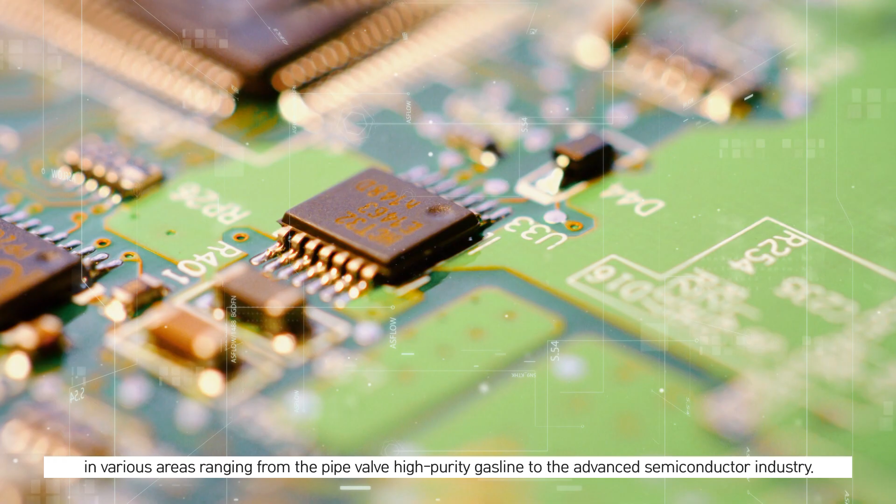Asflow Company Limited specializes in manufacturing technologically innovative parts and materials in various areas, ranging from pipe valve high-purity gas lines to the advanced semiconductor industry.

Having grown with the history of the Korean semiconductor parts industry, Asflow successfully localized semiconductor processing parts, first in Korea, and leads the semiconductor parts market.

Asflow has many patents and certificates of innovative and excellent products. By making more efforts to grow further and open new markets at home and abroad, the company will honestly and sincerely provide the best products for customers.

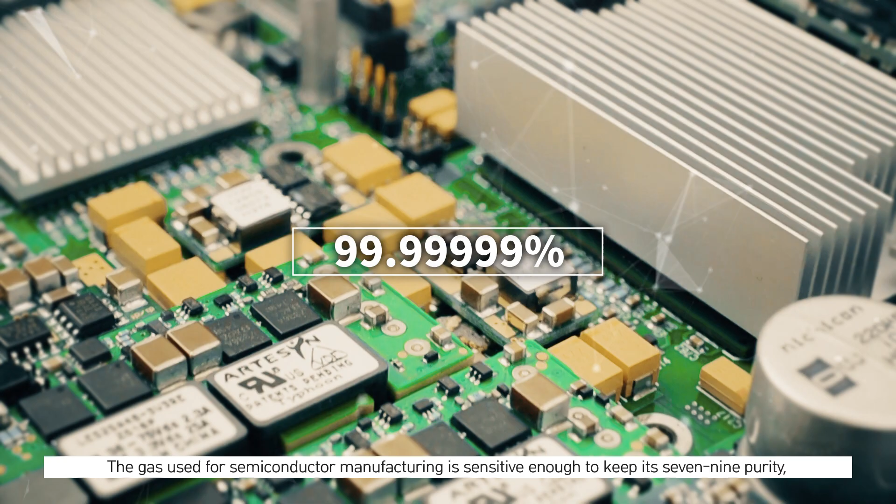The gas used for semiconductor manufacturing is sensitive enough to keep its seven-nine purity and is very corrosive. To transfer the gas, it is necessary to use parts with high corrosion resistance and ultra purity.

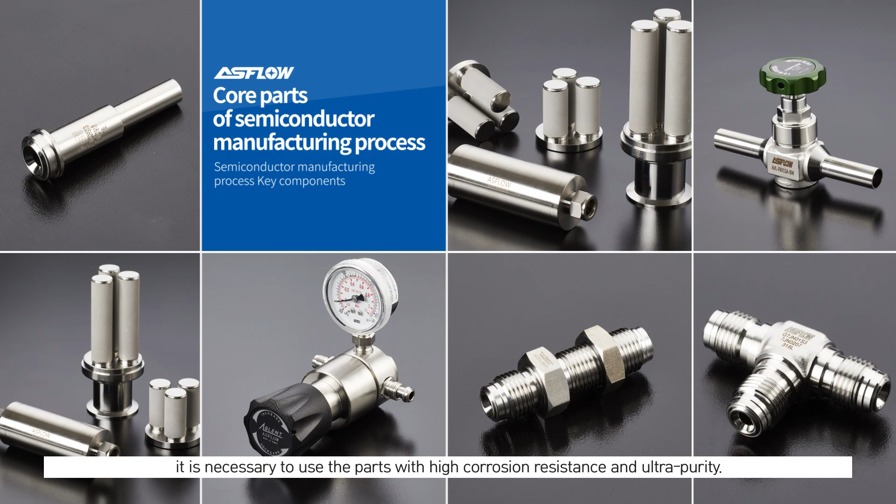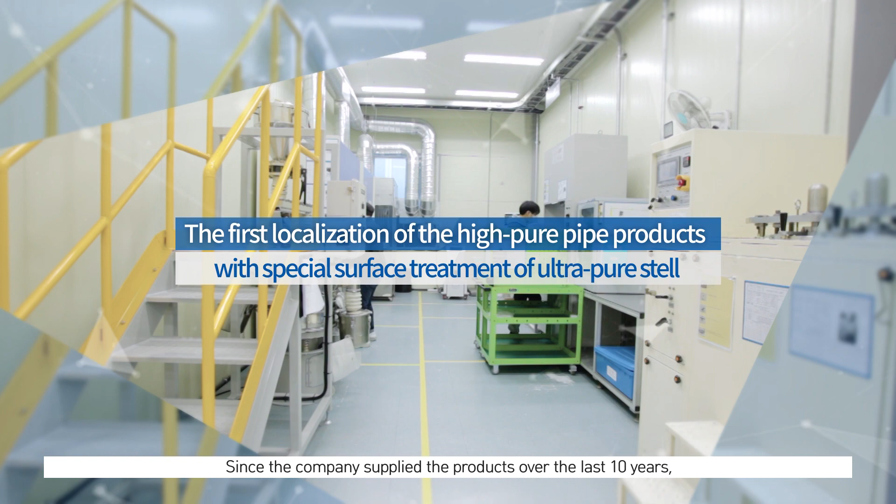The high pure pipe parts for semiconductor processing gas transfer had fully been imported. Asflow first localized them for the first time in Korea. Since the company supplied the products over the last 10 years, it has achieved import substitution worth 1 trillion KRW so far.

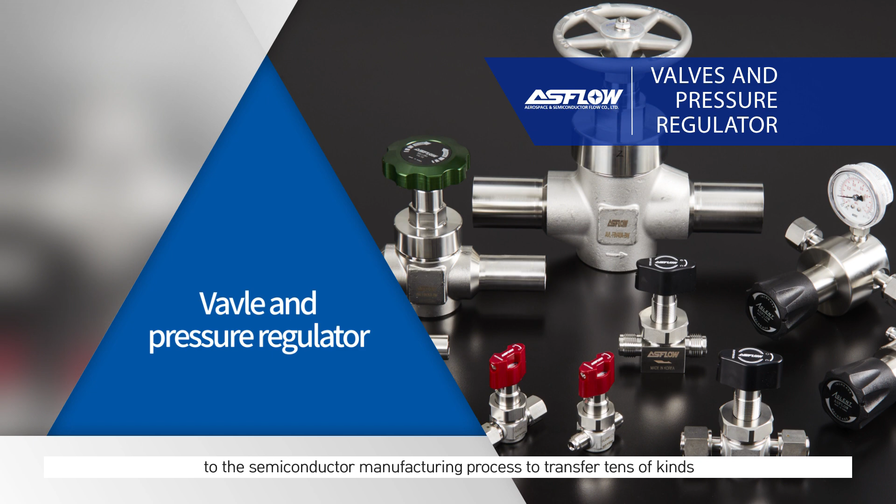The high pure tubes, pipes, valves, and filters manufactured by Asflow are key to the semiconductor manufacturing process, transferring tens of kinds of gas for semiconductor manufacturing to semiconductor equipment.

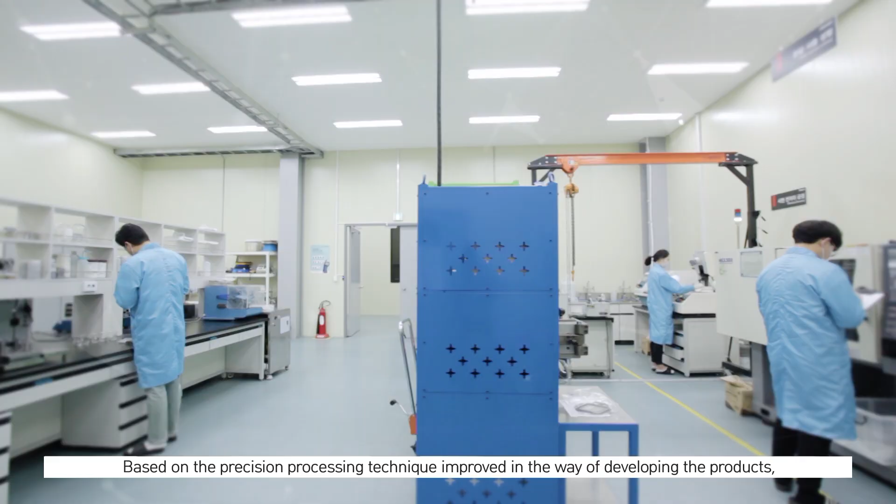Based on the precision processing technique improved as Asflow's way of developing products, the company developed high pure valves, pressure regulators, filters, and others.

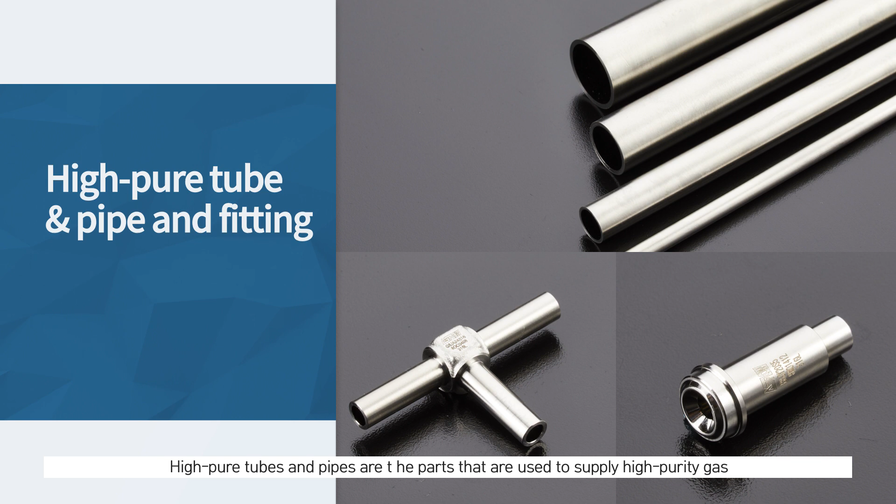High pure tubes and pipes are the parts used to supply high purity gas to semiconductor equipment without any inflow of impurities. A narrow and long tube or pipe has a few millimeters to tens of millimeters in diameter and 4 meters or 6 meters in length.

All impurities, flaws, and fine scratches are removed from its inside. So the high pure product is as pure and clean as a mirror.

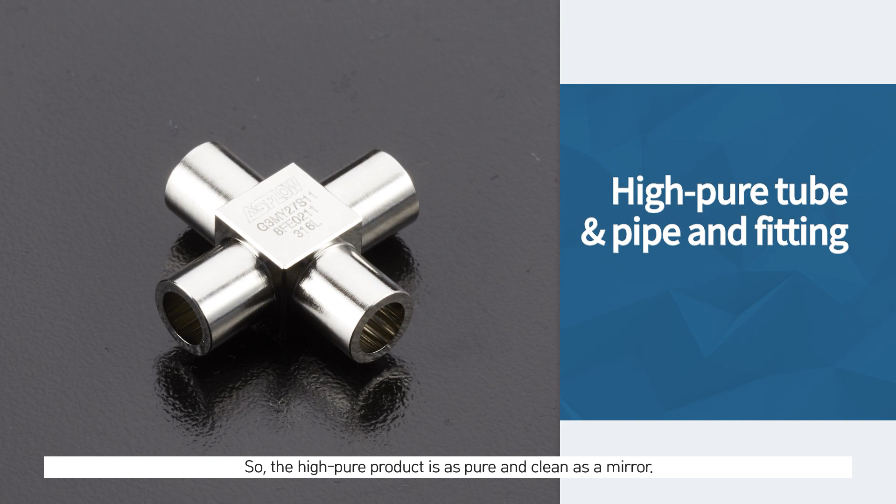Fitting is the product which is used to connect high pure tubes or turn at right angles. Like a tube and a pipe, fitting is also a high pure product without impurities and flaws.

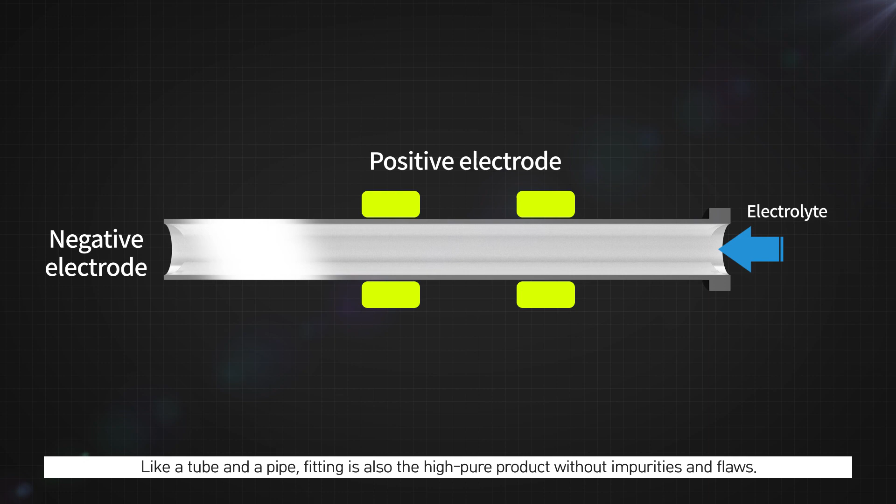A product used at high pressure is forged at 1000 Celsius and 100 kg per square centimeter or more in order to remove its inner flaws completely.

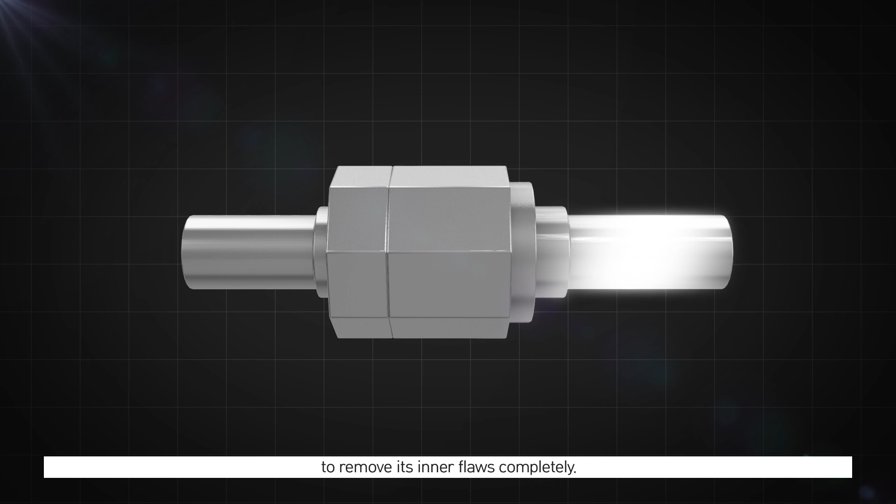Valves and pressure regulators are the control products that are used to supply a certain amount of high purity gas for semiconductor processing at a certain pressure.

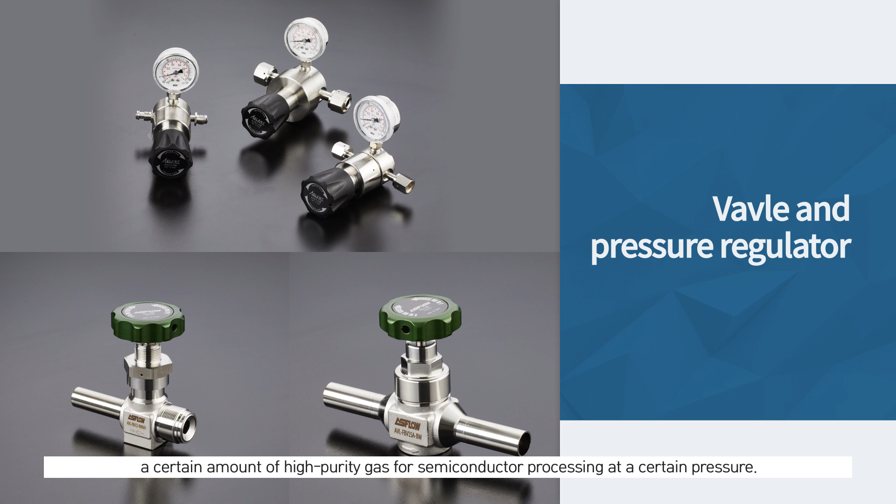The advanced product is used to supply high purity gas at an even pressure. The high purity gas comes in at the high pressure of a few kilograms to hundreds of kilograms per 1 square centimeter.

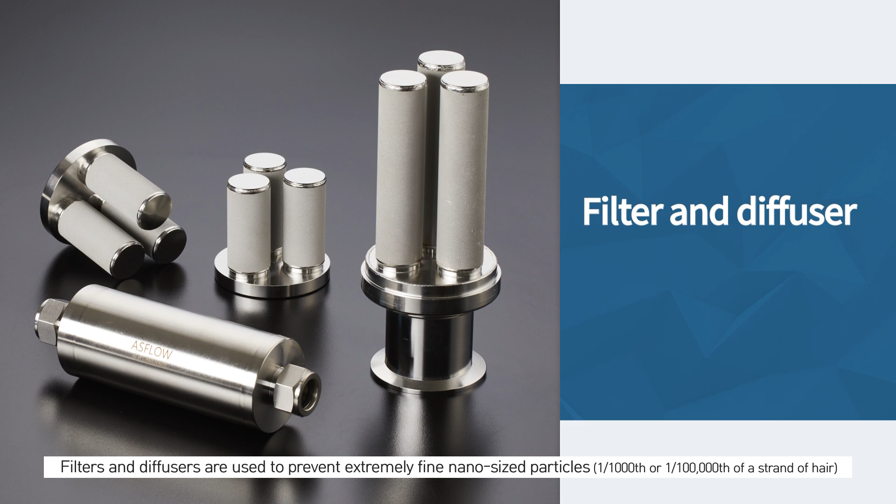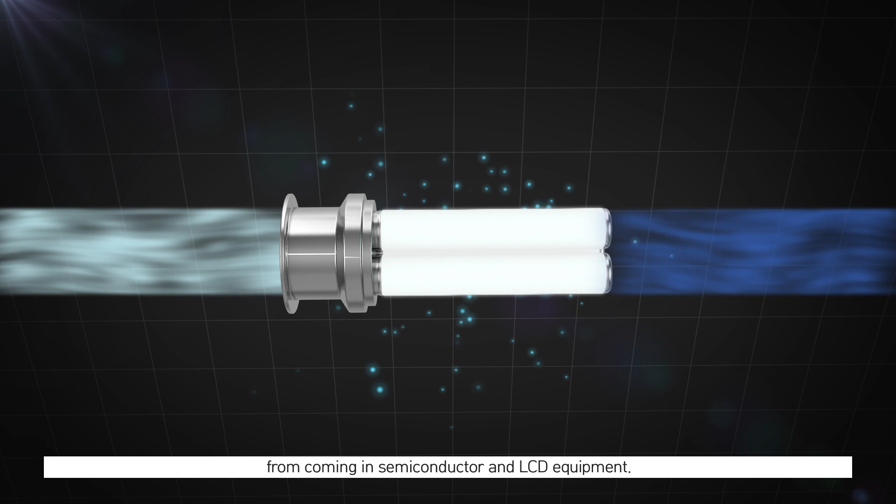Filters and diffusers are used to prevent extremely fine nano-sized particles from coming into semiconductor and LCD equipment. As core parts, the products play a role to block impurities from semiconductor equipment completely and thereby improve semiconductor production yield.

Based on the professional development of parts and materials, Asflow supplies the parts and materials for semiconductor processing gas to domestic and foreign semiconductor makers. Thanks to the excellent performance and quality of the products, the company is recognized by semiconductor makers.

With the expansion of the fourth industrial revolution, the demands of memory semiconductors are on the sharp rise. In line with the trend, Asflow expands its global semiconductor equipment market.

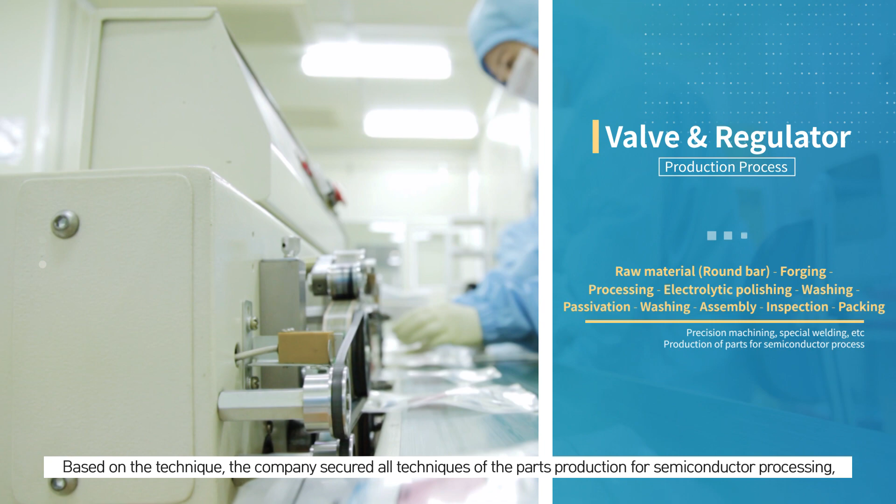Surface processing technique is the unique and core technique of Asflow. Based on the technique, the company secured all techniques of parts production for semiconductor processing, such as precision processing and special welding, and set up a batch production process.

The best technology of Asflow is recognized not only in Korea, but in foreign countries. Therefore, Asflow exports its products and grows into a global enterprise in the world.

By developing technologies for parts in various areas, ranging from semiconductor processing, hydrogen production, and bioengineering, Asflow establishes a bridgehead to expand its business to the future energy industry.

Asflow produces eco-friendly, higher value-added products with its motto of sincerity and honesty. Asflow, the world's best enterprise to make the world beautiful and convenient, promises a better tomorrow for dreams, challenges, and love. The enterprise preparing for the coming future, Asflow Company Limited.